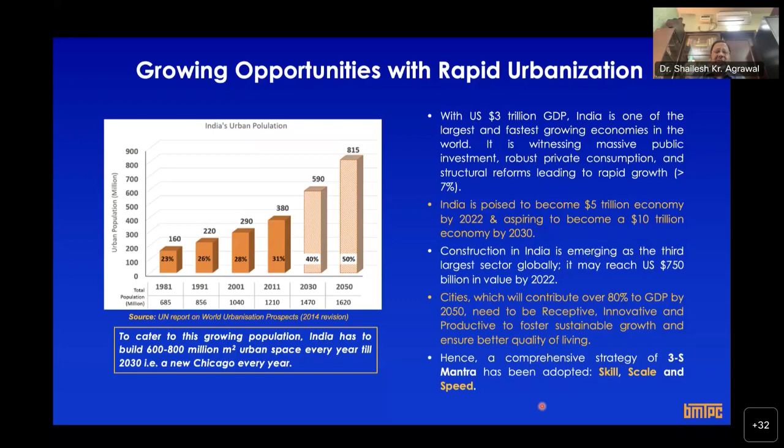This is that slide I was talking about, because this entire effort of NAVARITIH is under the Ministry of Housing and Urban Affairs, by BMTPC, and this quest for new technologies or innovative technology started with the Global Housing Technology Challenge, which I will also be discussing.

That GHTC, or this search for innovative technology, started under Pradhan Mantri Awas Yojana. Under Pradhan Mantri Awas Yojana, we are running a sub-mission called Technology Sub-Mission, and through that we organized a Global Housing Technology Challenge, shortlisted these new technologies, and now we are promoting them across the country. To give you figures of Pradhan Mantri Awas Yojana, the validated demand given by the states in 2015 was 1.12 crore houses.

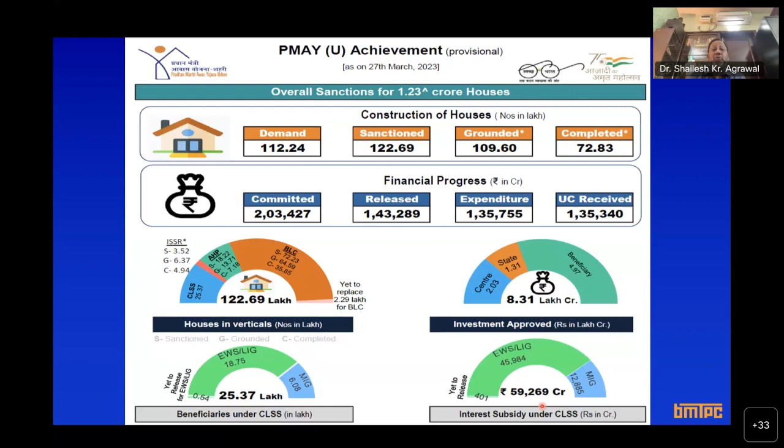That was the urban housing shortage in the EWS sector, economically weaker section, or poorest of the poor. Right now we have sanctioned 1.23 crore houses, out of which 72.83 lakh houses have already been completed and handed over to beneficiaries, and around 1 crore houses have already been grounded. Out of these, 16 lakh houses are being constructed with these new technologies, which I will be discussing with you.

And when we talk about these technologies, sometimes questions are asked, are we reducing the use of cement or steel? We are using cement and steel, but we are using them efficiently.

Pradhan Mantri Awas Yojana has also been helpful in generating employment, and you can see through this slide that so many mandays, so many jobs have been created, 2.77 crore jobs have been created through Pradhan Mantri Awas Yojana.

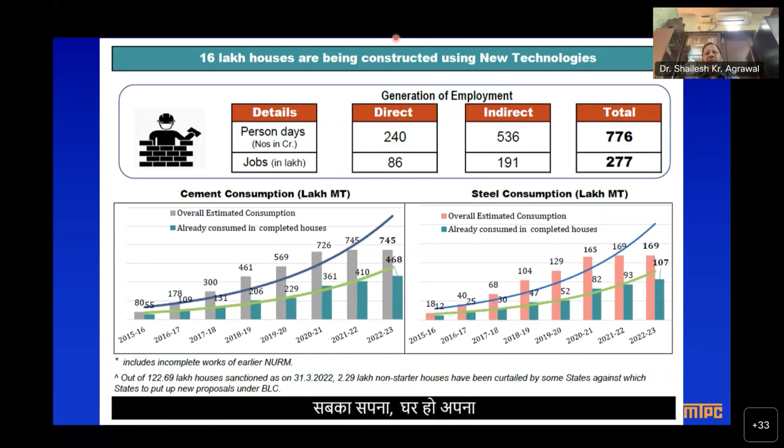The bottommost portion of this slide shows you the cement consumption and steel consumption through Pradhan Mantri Awas Yojana. This is just for your record, showing how many houses are being constructed under this scheme.

Now let me come straight to the lecture. When we talk about construction systems, a natural question comes to everybody's mind: what is a construction system? There are two things, dear friends. One is material, so we are using material like cement, concrete, or building elements like brick, brick blocks, or panels. But construction system is the system which helps in transferring the load of the building to the foundation. So the structural system is what is called the construction system. We are trying to replace the conventional construction system with an innovative construction system.

So what do we have? What is the business-as-usual approach, or what are the construction systems which are prevalent world over? One is, all of you are aware of, RCC framed structure, meaning we make a beam-column RCC frame, which is cast in situ normally. So we have a formwork, then we insert a reinforcement cage, then we do the concreting, and remove the formwork. That's how a network of beams and columns is cast. Then we cast a slab, and then we fill the walls with infill walls. This is the most prevalent system world over, called the RCC frame construction system.

So the question is, can we replace this system with any other construction system? That is the whole premise of this lecture, these innovative construction systems. I hope you understood that we are not trying to tell you to replace the material, but to replace the construction system.

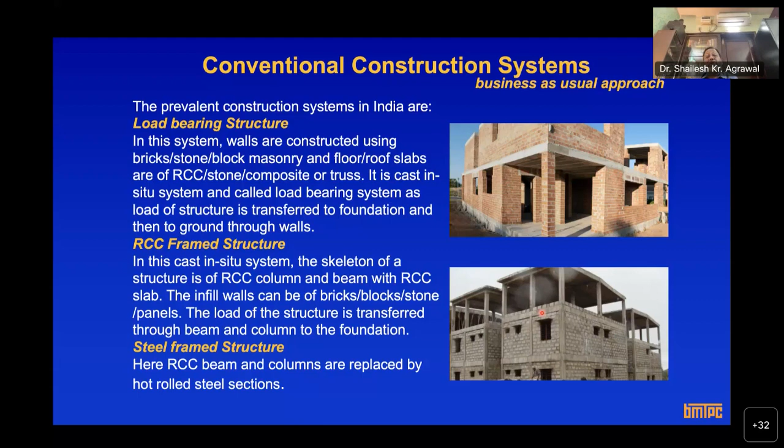So what I'm trying to tell you is to use these materials - cement, aggregate, sand - optimally. Nobody knew that sand would become so precious. So use these materials optimally.

Okay, and then during COVID time also, it was seen that there was a mass exodus of workers, laborers from cities to their own native villages and all. So can we have technologies? Can we have... and all construction works came to a standstill during COVID time. So that also needs to be seen.

Can we mechanize? Can we industrialize the entire process of the construction system? Mechanization and industrialization of the construction industry is also the need of the hour, and for that we require these kinds of systems. So the basic premise is that instead of doing everything at the site, if we do 50%, 60%, or the entire thing under controlled conditions in a casting yard or factory - it's sometimes called assembly line production also, like a car or automobile industry you might have seen. So can't we have assembly line production in the construction sector? You bring column, bring beam, bring slab, erect them, and your building is ready.

Okay, and the third point is also very important for us as engineers and architects. When I studied, 40 years back, green buildings were never talked about, sustainability we never heard of. But now, as engineers, as professionals, as project directors, it's our responsibility that whatever project we undertake, whatever materials or construction system we use, it has to be sustainable. There should be minimum wastage, and the project should be somehow green, energy efficient, eco-friendly. So all these things need to be talked about, and these innovative construction systems help with some of these things.

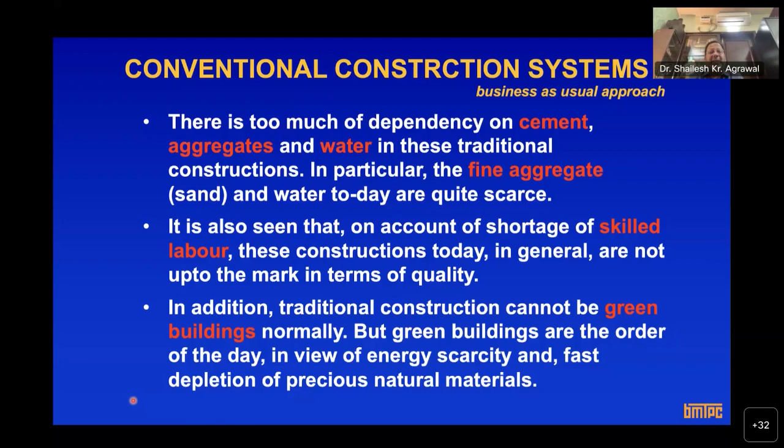Energy efficiency is also very important. So we need to use energy efficient materials, energy efficient construction systems, and then eco-friendliness. The materials, the technologies we should use should have less greenhouse gas emission and can be recycled. I will show you the life cycle cost also. And then health is also very important, health of the occupants.

Many times we take it for granted that when we construct a building with a business as usual approach or with conventional materials, the inside air quality is good, but which is not the case. The kind of paints, varnishes, pesticides, detergents and other things we use, the inside air quality is sometimes more poisonous or more dangerous than the outside air quality. So health of the occupant is also very important.

Friends, whenever you think of a project, think of resource efficiency. What kind of waste material are you using? Is that waste material fly ash, slag, or any other material? Then, compared with conventional materials, in what way is your project saving on energy? So there is a concept of embodied energy. What kind of embodied energy do the materials you are using have compared to your conventional materials? Then eco-friendliness, less greenhouse gas emission, less noise and air pollution, and the health of the occupants.

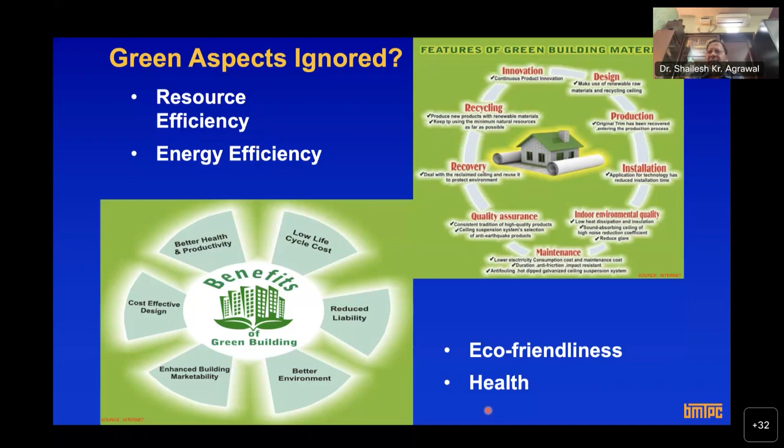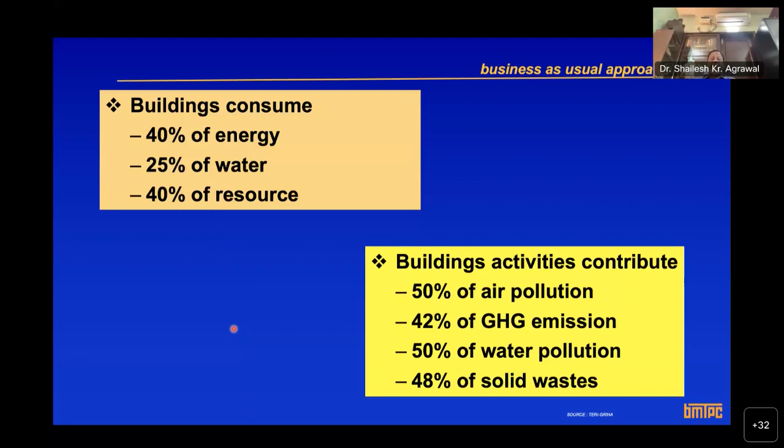Also, whenever we are talking about these new technologies, our architects and other friends keep asking, sir, these are thinner elements, how do these technologies fare when we talk about functional parameters like fire resistance or fire rating, then thermal, and then sound acoustics? So let me tell you that all these new technologies, because in the beginning I told you that these technologies are time tested and proven, the thermal efficiency, sound acoustics, and fire rating of these technologies are as good as your conventional system.

And let me also tell you that if you are doing a construction in the Indian context, all these new technologies have to comply with the existing Indian standards. Whenever we undertake a construction project, like for earthquakes, for concrete, for the National Building Code, or for anything, we have codes. So if we say that in a residential wall a fire rating of 2 hours or 1.5 hours is required, these technologies need to comply with that, and they comply with all these things.

So most of the time I am asked, sir, what about fire rating? And also, if the fire rating is not as per the existing National Building Code or the other relevant code, the technology cannot be used. So most of these technologies comply with that.

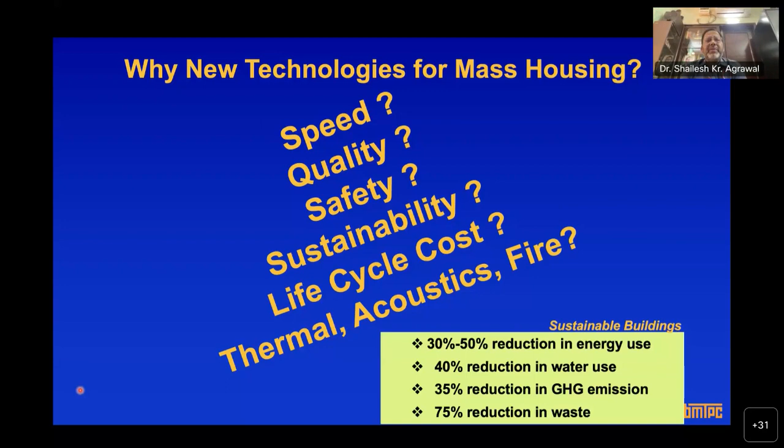So the idea is to take our country from level 0 to level 4. These levels show the levels of construction technology in our country. Level 0, all of us know about it. We collect the basic materials at the site, then we call the labor contractor, we erect the formwork, we erect the reinforcement, then we do the concreting, the curing, plaster, and all those things. That is level 0, and this is the most prevalent level in our country.

Then level 1 is where, like bus stands, railway platforms, or industrial buildings, we have steel trusses or steel columns manufactured in the factory, primarily steel structures. You all know how industrial structures are being constructed nowadays. Those trusses are brought to the site and assembled there, and you make that structure. So that is level 1.

Level 2 is where you make these building components. In level 0 you collect the material at the site, and here all building components, structural and non-structural, whether it is a beam, a column, a wall, a staircase, a sunshade, or any other element of your building, a shelf.

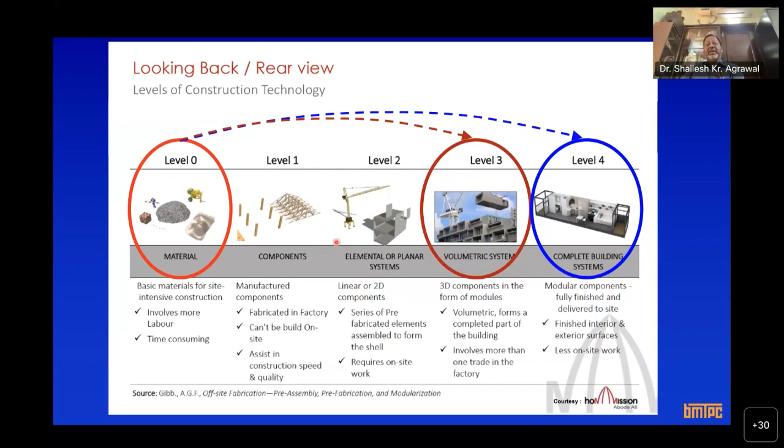There is another very interesting terminology which is knocking at the Indian construction sector: DFMA. Okay, all of you know, when we talk about construction, what comes to our mind? We think of a contractor. Okay, a contractor will come and he will construct. We will give him material, or we will ask him to bring the material, and then he will do the construction. Nowadays, agencies are available which are called DFMA agencies, and DFMA stands for Design for Manufacture and Assembly.

So, as per your project requirements, as per your project site, these agencies will entirely conceive your project, set up plant and machinery for you, then manufacture those building components there, assemble your building, and then go away with the plant and other things. So they are called specialized DFMA agencies. So the entire project will be conceived by them, including plant, machinery, and everything. So in times to come, instead of a contractor, you will look for this DFMA agency if you want to use these innovative technologies.

So they will set up a plant near your site, or if your site is near to the factory, then you can always take the material from the factory. Otherwise, at a casting yard, they will set up plant and machinery, and once the project is over, they will take away that plant. So I thought I will introduce you to this term. So replacing the word contractor by DFMA, Design for Manufacture, Design for Assembly.

Okay, and then this is also very interesting. Whatever I have so far told you or taught you, let's replace construction by manufacturing of building. The moment you understand the difference between construction and manufacturing of building, you will understand what I am talking about. Okay, so the moment I say manufacturing of building, that means you are doing something under controlled conditions, in a factory-like environment. I use the word assembly line production. So make building components, make the building under controlled conditions in the casting yard. So instead of constructing a building, manufacture the building.

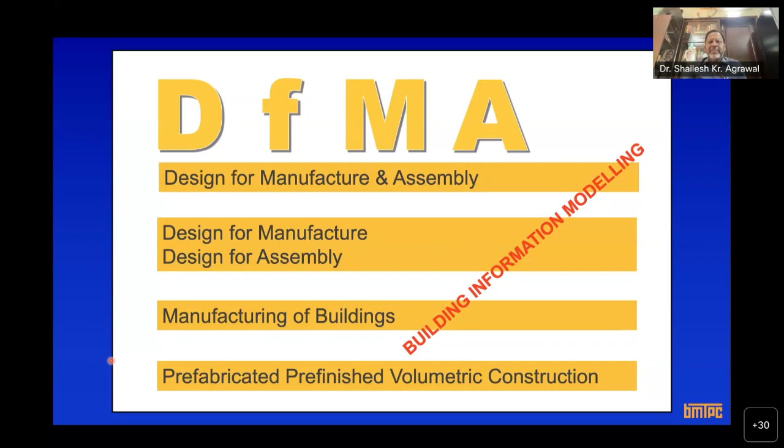As I told you, there is one startup. They have just bagged a project for printing barracks for the Ministry of Defense near Chandigarh. So 3D printing, again, nobody thought that we can print a house. Like we do printing, we just feed a command to our computer and we get the print. Similarly here, the entire thing is industrialized, and you have to just give a command and your house is printed with the help of robots and other complicated machinery. And here the construction ink is nothing but a specialized concrete. So you have robots and a construction ink which is concrete, and you can print the entire house.

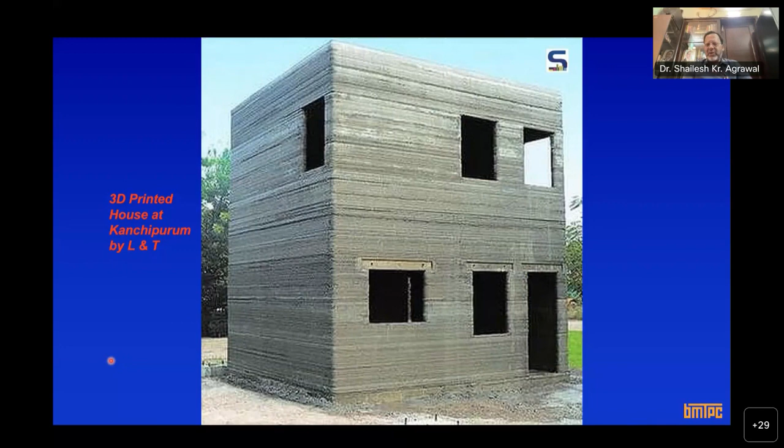So this was the background of the new technologies and the terms associated with them, and why we require these technologies. And now let me briefly introduce these technologies. As I told you, we have categorized these technologies like this, but it is not sacrosanct. It is just for better understanding and better comprehension. We have given the names, and each category will be explained to you in detail from tomorrow onwards. But today I will briefly introduce all of them to you. So I've given a name: engineered formwork system. This will be explained to you the day after.

Then stay-in-place formwork system, sandwich panel systems, cold-formed or light gauge steel structural system, then steel structural system, and then precast concrete construction system. And the precast concrete construction system category has been divided into two. One is 3D volumetric, the entire module, as I explained to you; otherwise, you make 2D or linear elements and then assemble them at site. So as you can see, 2, 3, 4, 5, 6, 7. So each day, one category will be explained to you.

Okay, and I will now briefly introduce these categories to you. But before that, let me also tell you that I have put 2 or 3 slides for you, because whenever we deliver this lecture, a whole lot of questions are asked. Sir, are we compromising on quality? What about time? What about cost of construction?

So let me tell you, for any new technologies, we have in fact created a framework, a technical framework also, to evaluate these new technologies as compared to conventional. So at no point of time, or nowhere, are these innovative technologies inferior to conventional as far as quality, time and cost are concerned. So let me just explain to you.

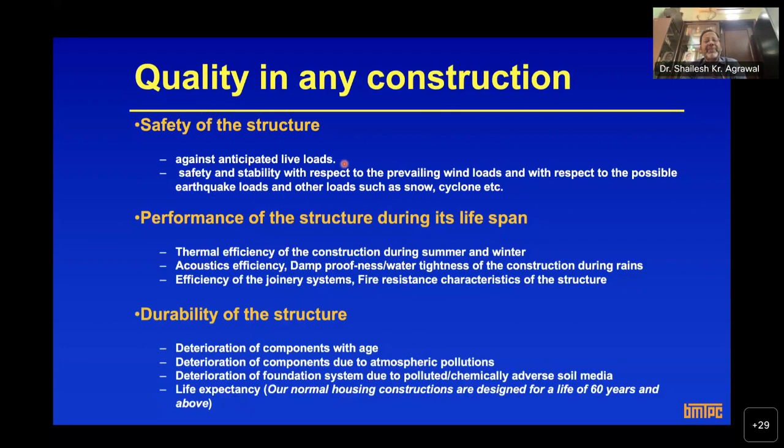Okay, then I already explained to you about traditional construction, that one is quality, then another is time. So when we talk about time or speed, traditional construction, all of you know, is slow-track construction and not amenable for mass housing projects. And because of undue time taken, most of the projects are caught with time overrun and cost overrun. And once your project is into time and cost overrun, a lot of overheads are added, there is a whole lot of wastage, not only in terms of human resources, but in terms of material as well. So speed of construction is the need of the hour.

Okay. Also, it has become essential to go in for faster construction in order to meet the heavy demand and in order to cut wastages and overheads. So you all agree with me, speed is one of the important criteria to decide the technology to be used.

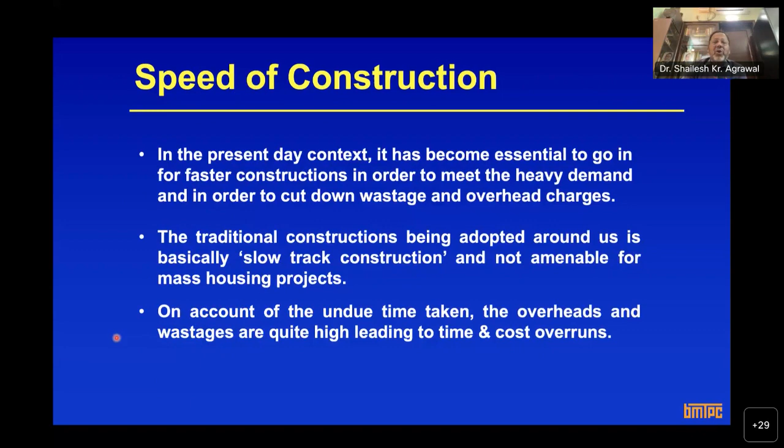Okay, and this is just a slide to show you that the most common question which comes to our minds is, what is the cost? So the cost can also be reduced considerably once the technology is mainstreamed. You can see these economies of scale. Okay, so economies of scale plays an important role while deciding the costs. Let me explain economies of scale, because most of these technologies are based on factory setup.

So let me give you an example: suppose you set up a plant for manufacturing one shirt or 100 shirts. Okay, so if you produce one shirt or if you produce 100 shirts, the factory setup is the same. So if you make 100 shirts, the cost will be equally divided into 100, otherwise it is loaded on one shirt. That is called economies of scale.

So similarly, if your project size is bigger, then the cost will be less than the conventional cost of construction. That is called economies of scale. So whether you are doing precast concrete construction or steel structure or anything, economies of scale plays a very important role. So this is for the initial stage.

Once the technology is mainstream, once we have enough plants across the country, economies of scale will also kick in, and you can have as good, as robust a house at a similar cost as conventional construction.

Because we are talking about climate change, global warming, greenhouse gas emission, eco-friendliness, green buildings, resource efficiency, and climate responsive design, cost is not the only factor. It is environment, it is time, it is quality. So cost effectiveness is more important, more critical than the cost per square meter.

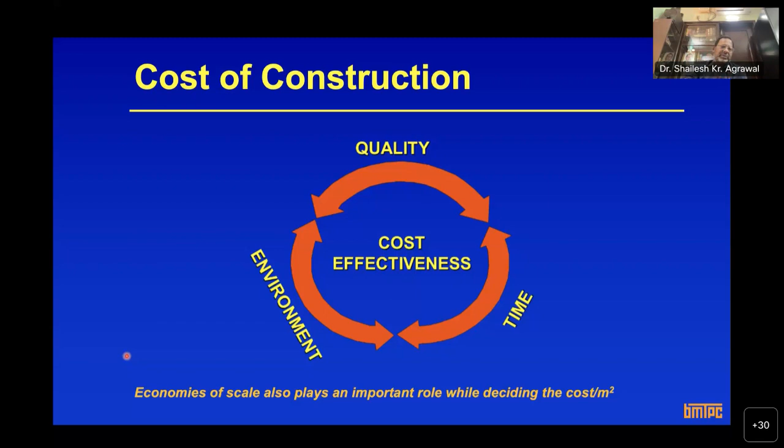So this is the background, and to sum up, the end user benefits through these technologies are: a safe and disaster resilient house, better quality of construction, low maintenance, speedy construction resulting in early occupancy, cost effective and environment friendly construction, which is also very important, and better functional performance of the buildings. So this was the background.

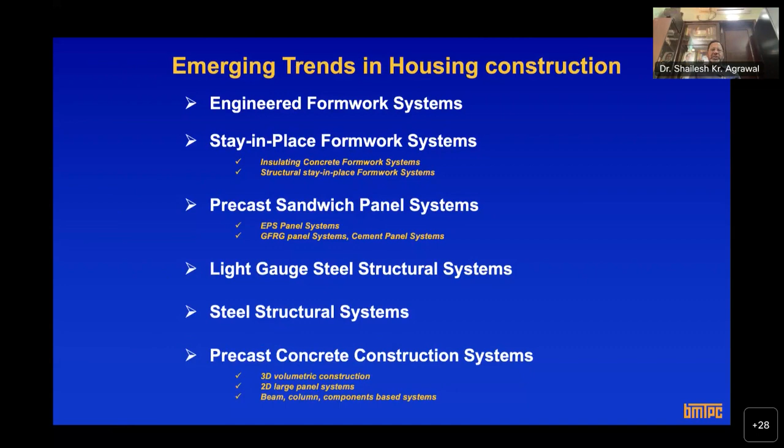A whole lot of formwork systems are used in the country, and this is the conventional or traditional formwork. Nowadays, this formwork can be replaced by aluminum, which you might have heard of as aluminum formwork system, or formwork made under controlled conditions in the factory. There are manufacturing plants where you make customized, tailor-made formwork suiting your project requirement. That is called engineered formwork system.

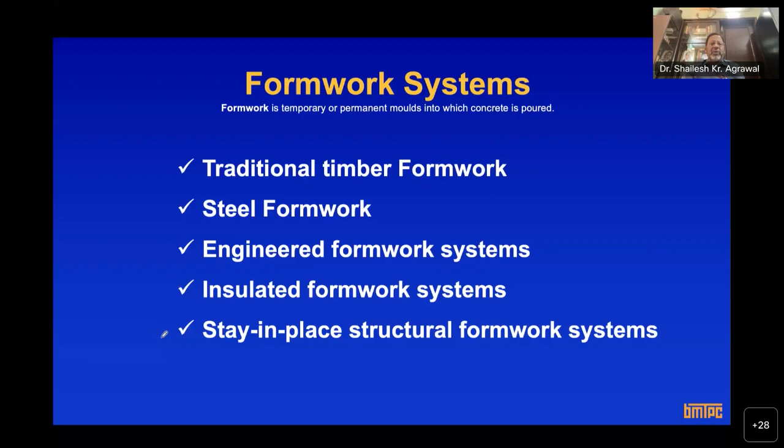There are another 2 kinds of formwork system which I will explain when we talk about that category. The first category is engineered formwork system, and most of you know this system as Mivan, or alu-form, or aluminium formwork. Through this picture I am trying to explain what this is.

This is a conventional construction system where the red thing you see in the upper right hand corner is the formwork, this is the reinforcement, then you put the concrete, remove this formwork, and this formwork can be of steel, plywood, or wooden planks. What about replacing this entire formwork with a customized formwork system made of aluminum, where there is no need to make beam, column and slab separately?

Here the entire formwork is manufactured in the factory, then brought to the site, and you do the casting in one single pour, then remove the formwork the next day and take it to the next floor.

So you can understand the advantages. This is called aluminum formwork. This can be called shear wall system. This is called monolithic concrete construction. There are umpteen number of names to this system: monolithic concrete construction, shear wall technology, or most of us know it as Mivan, because Mivan was the company from Malaysia who introduced this system to the country. Now Mivan has stopped manufacturing this formwork in Malaysia, and they have set up a factory here in our country.

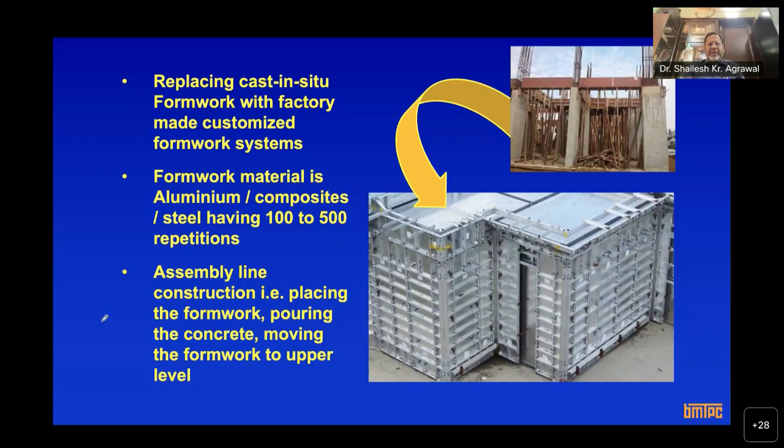So the staircase, the sunshades, everything is cast together—it's a pure monolithic construction. As you can see, the conventional mode of construction is RCC frame construction with infill walls: you make beam, column, and then infill walls. But here, all walls, floors, slabs, stairs together with door and window openings are cast in situ monolithically, using specifically designed custom modular formwork, normally made of aluminum. And most important is appropriate grade of concrete.

Self compacting concrete is being used. I'm not going into detail because there will be two lectures on this technology. So you have to use an appropriate grade of concrete which gains early strength. It should be self compacting concrete as per design, and it ensures assembly line production.

Remember, another thing is this is suited for mass housing. Mass housing means multiple units of repetitive type, when a similar design is repeated several times. But now this technology is very popular and widely used across the country, so even for 50 houses, this is more economical than conventional construction.

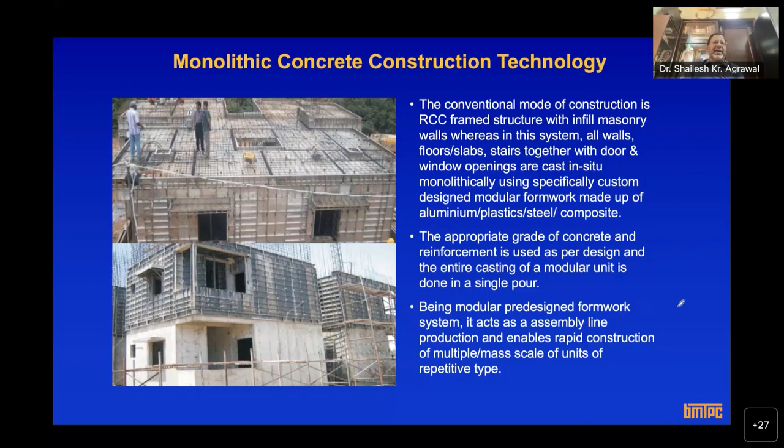Earlier, you had to have a certain economies of scale, but now the technology is mainstream and being used. So even for an isolated few number of houses, this technology is becoming viable.

Okay, another picture you can see, and another important thing here for all these technologies I am talking to you about: the foundation is conventional. Foundation conventional means it can be isolated footing, it can be continuous footing, it can be pile foundation, it can be raft. So why are we keeping conventional foundation? Because India is a vast country and soil conditions vary from place to place.

Somewhere we have black cotton soil, somewhere we have rocky terrain, alluvial soil. So depending upon water table and soil characteristics, you have a foundation reach up to the plinth level, and from plinth level above you start using these new technologies. I think I have a slide that I'll show you.

Once you come to the conventional plinth level, till that plinth level, the time taken by the project is similar to your conventional project with conventional foundation. Over and above that, the time is greatly reduced.

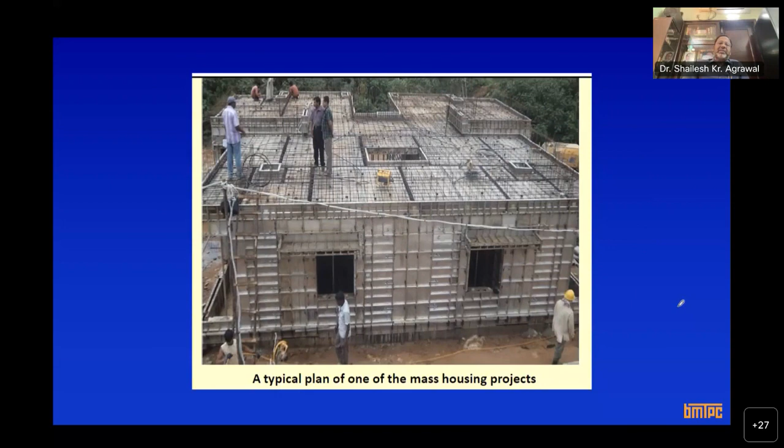Okay, so this is again a view, then you can see here. So what you see in this topmost left corner: up to plinth level this is conventional construction, and then you leave these dowel bars, and then you erect the reinforcement, erect this aluminum formwork, and then do the casting, then take it to the next floor. So this is that formwork.

As I've been telling you repeatedly, day after tomorrow there will be a specific 3-hour lecture on this technology, one by a CPWD engineer, and then by an industry expert from L&T. So these are the stages: you come to the plinth level and then do like this.

You can see this is again a finished mass house project under PMAY using this technology. As I told you, several lakhs, several thousands of houses are being constructed across the country using these technologies, and there are many advantages with this technology.

There is another variant, there are a number of variants of this technology. This is called tunnel form, and again this will be explained tomorrow. Here what we are doing is making the formwork for the entire dwelling unit, all 4 walls and all. Here only 2 longer walls are being cast, so it creates a tunnel kind of thing.

This technology we have used in one of our lighthouse projects in Rajkot, which I will be showing you, and that project was completed in a record time. In Rajkot we used tunnel form, and the building is S plus 13, 14-story building, and the entire 14-story building, each floor had 8 dwelling units. The entire thing was cast in 45 days, the entire skeleton. So this tunnel form, along with slab, was cast in 45 days for the 14-story building.

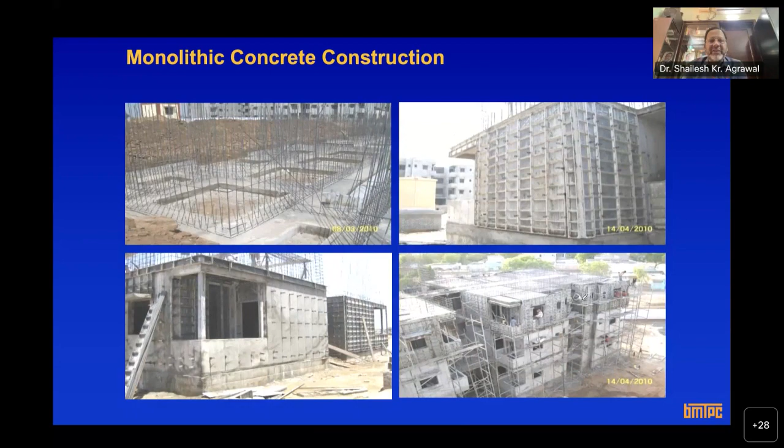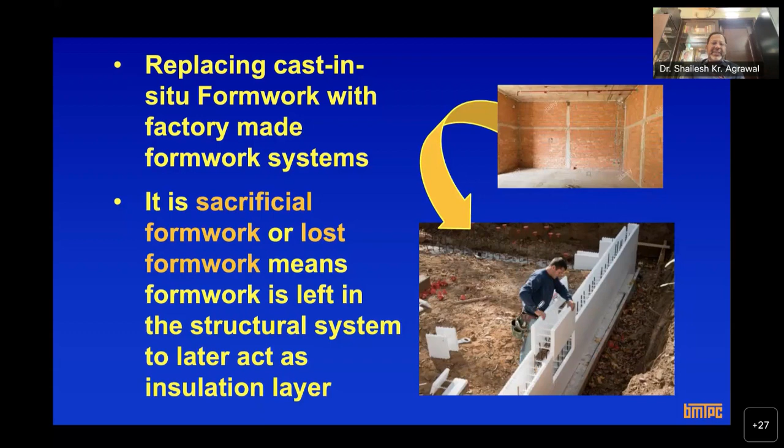So this acts first as a formwork system, and then it stays with the structure, and later, because it is expanded polystyrene, it acts as an insulation, and that is why it is called insulated concrete formwork system. So we are replacing cast in situ formwork by this factory made expanded polystyrene formwork system, and this is called sacrificial formwork or lost formwork. Means formwork is left in the structural system to later act as an insulation layer. There are several companies in our country who are into this kind of formwork system. You can see any joint.

So again, remember another thing I have been telling you, that all these technologies are customized or tailor made. Tailor made means you go to a tailor, and as per your size, as per your requirement, he or she stitches a jacket or a shirt for you. Similarly here, as per your project requirement, as per your plan layout, the agency will make these building blocks or formwork systems for you in the factory, customized, and then give them to you. So L, T joints and everything, depending upon the size, depending upon the height.

Okay, these formworks are manufactured and then brought to the site, and then placed on the already laid plinth. Again, the foundation is conventional; you have to reach up to the plinth level, reach the dowel bar, and then over and above that you will put this.

Again, for this technology also, we have an industry expert from Mahindra Lifespaces. He will be giving a lecture on this along with a scientist from CBRI. They will be discussing this technology in detail with you. Okay, so I think the basic premise or the basic background you understood, that this formwork is left in the structure. That is why it is called stay in place formwork.

And then these are two, and depending upon this, the thickness can be 150 as per your fire requirement, as per your structural requirement. You can have more width or more thickness. Okay, and you can put reinforcement and other things also. You can see this, and you can see this is a closer look again from India. So this is how it is being put, and once this is being put, then you do the concreting. You can fill the cavities, or you can leave the cavities as it is, and then on both the sides you can do shotcreting.

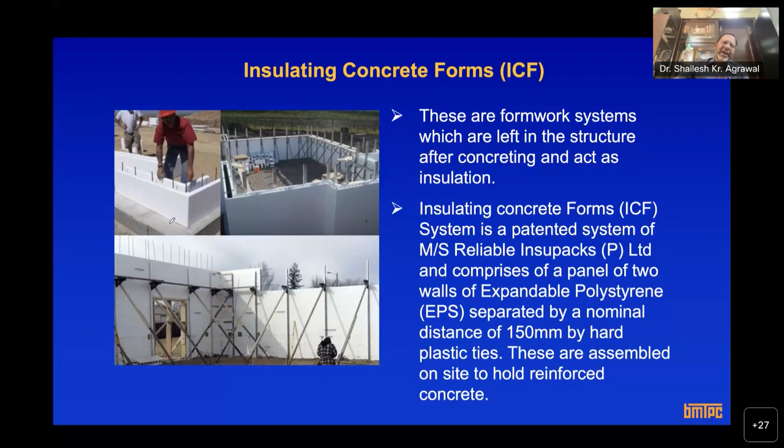Again, Coffor is the name of the company which is manufacturing this formwork. Again, it is customized as per your requirement. These Coffor panels are made in the factory and then brought to your site. And this formwork system can be used as a load bearing system, so there is no need to have beam columns.

You can just erect these panels, which are galvanized. I will show you. So these are galvanized plain steel sheets with a rib lath mesh, reinforced by C profile GP sheets as vertical stiffeners. I'll show you another slide. Then these grids are further connected by MS rebars. Okay, yeah, you can see here.

So this is a panel which is made in the factory, and then over a plinth you put this and then do the concreting. Here you require a sticky, less flowable concrete, and then you do the concreting and then you do the plaster. So this first acts as a formwork, and then later it acts as structural steel.

So after the erection of formwork panels in alignments, corners, edges for doors and windows, with rebar positioning placed, concrete of the required grade is poured, and once the concreting is done, the walls can be finished with plaster. So this is simple, and these walls can be thinner because you are using this formwork of galvanized plain sheets. This panel is made.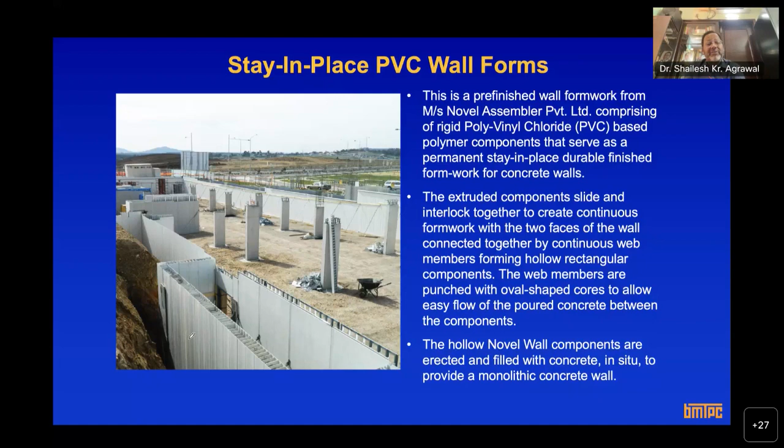We are dedicating 2 sessions. One entire session on light gauge steel structure system will be taken by a very renowned professor from IIT Hyderabad, who will be talking about light gauge steel structure systems, their equipment, how to design this, how to construct buildings using this, what kind of infill materials you can use. And there will be two lectures by IIT Kharagpur professors, who are basically architects, talking on hot rolled steel structure system.

Nowadays, steel structure systems have become very popular because the technology has changed. Nowadays we have TMT bars, and now we can make built up sections. Remember earlier we used to have hot rolled steel sections, I girders, channel sections, angle sections. Nowadays we can have hollow built up rectangular sections. Those have opened up a lot of flexibility into the structures, and you can use them for making a whole lot of different kinds of structure, and replace RCC beams and columns by these built up sections.

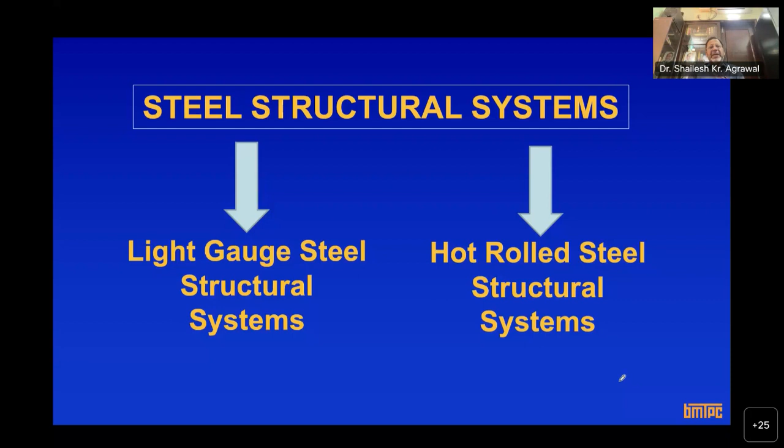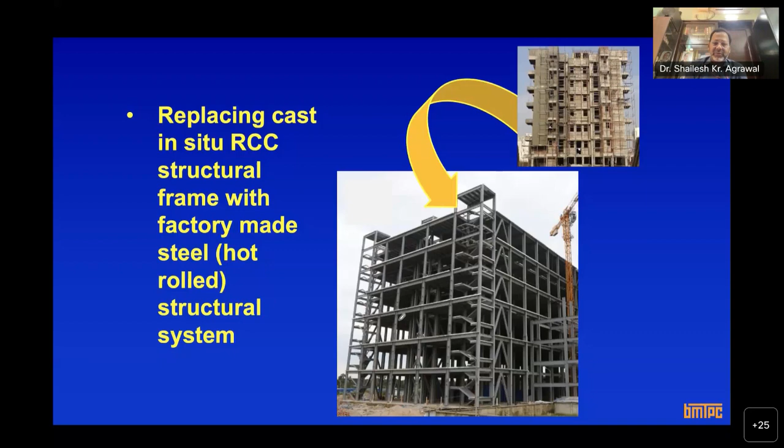Of course there is a whole lot of saving and speed. You can fast track the construction, because instead of making beams, columns and curing, you can just get them manufactured in the factory, and then you can have whatever drywall systems I told you about and insert those walls as infill walls here. I think I will show you that as well. So I think the basic understanding you must have got now. There will be a few lectures on this technology as well.

And let me also tell you that whenever we talk about these new technologies, the entire concept is done in a very professional manner through, you remember, computer aided design, manufacturing and construction. The entire thing is fed into the computer: your plan, layouts, elevation, the entire design process, and then through your software you get how many components are required, what kind of components are to be fabricated.

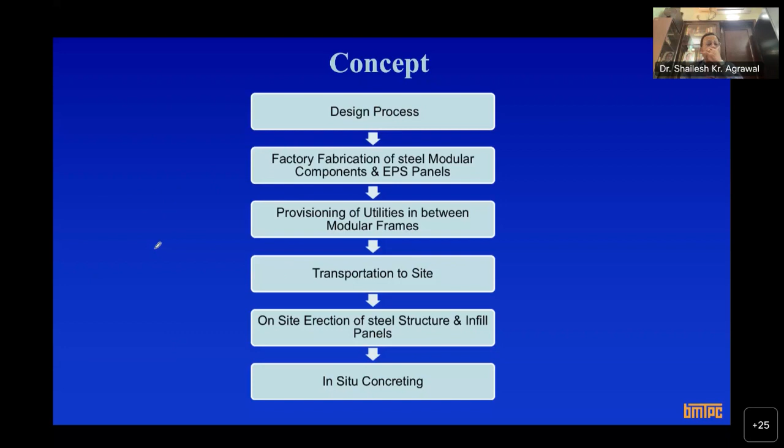So the entire thing is mechanized, automated, and then you fabricate those components in the factory. In the factory itself, you can give the provisions for services and other things, then transport it to the site, and then just erect them at the site. So the entire thing is an automated process, right from the concept stage to the construction or handing over stage.

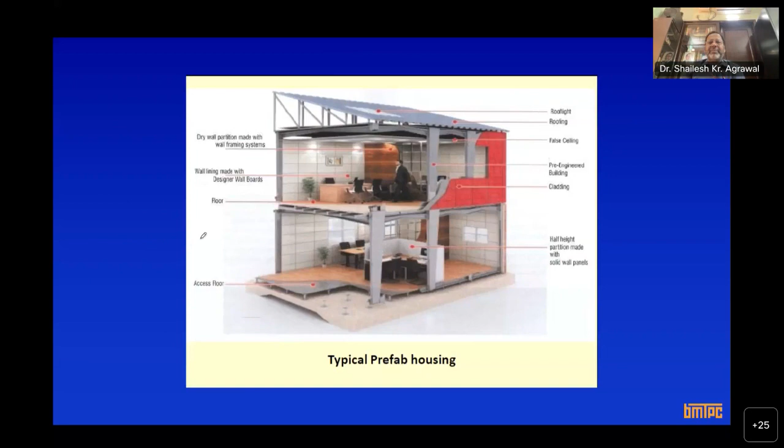You can see this. There is a company called InstaHome. InstaHome means instant homes. So they just make the entire thing for you, including finishes. I'll show you. You can see this. I just wanted to show you this.

So this is a very interesting 10-story mall, which was constructed in the outskirts of Chandigarh. You all know about Mohali. Mohali is quite famous for a cricket stadium. It's an industrial town in the outskirts of Chandigarh, where this mall was constructed in 48 hours. It was constructed, I think, in 2014.

This mall was constructed, and the entire operation was seen by the then Home Minister. The technology was not new. You just can't make out, but the technology is this: they have used steel beams and columns, and the walls are EPS. You remember I told you about EPS wall panels - so they have used EPS wall panels here, and steel. So by the time you do the foundations, you give the order for beam and column to the steel factory. They will manufacture those beams and columns for you, and then you just bring them to the site with all services, everything, and erect them, assemble them, and start using them at the site.

Since then this technology has been used, and nowadays, another interesting thing will be explained to you in one of the lectures on steel. Even the Ministry of Steel is asking all the line ministries to enhance use of steel in all their activities. So in the construction sector, we are also promoting use of steel. We use steel as reinforcement, but use of steel as a structural system for beam columns, trusses, and other things is being promoted because the technology has changed. Now we have built-up sections and all, which has opened up new areas and given a lot of flexibility. There is economy also when you use these built-up sections.

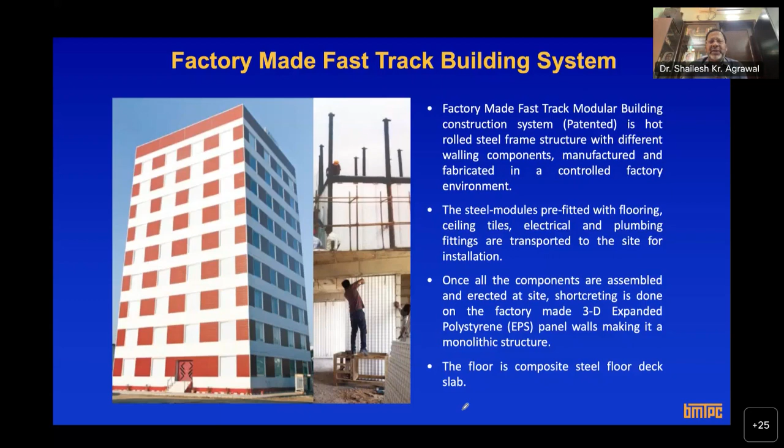Steel behaves quite good in tension as well as compression, so it is quite good for earthquake resistance as well. You can see this for quickly rehabilitating in case of disaster and all, it can be used for quickly erecting or quickly rehabilitating people.

This is a site near Dehradun. Some officers' mess and other structures for the Ministry of Defense are being made by the same company. These columns and beams were manufactured in the factory, and then they are putting the EPS. Here the slab is a deck slab - all of you know deck slab. So you put a profile sheet, and over this you put a nominal reinforcement, and then you do a screed concrete to create a slab.

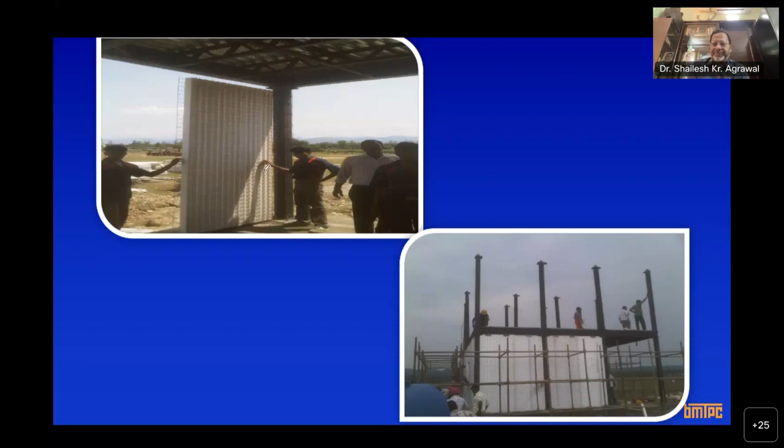In fact, I have used this technology after the Hudhud cyclone. We were asked to give a technology which can quickly rehabilitate the displaced people during the Hudhud cyclone, so this was the technology we gave. You can see these - this is near Vishakhapatnam, and Vishakhapatnam is a coastal area, so we have given them coating and all.

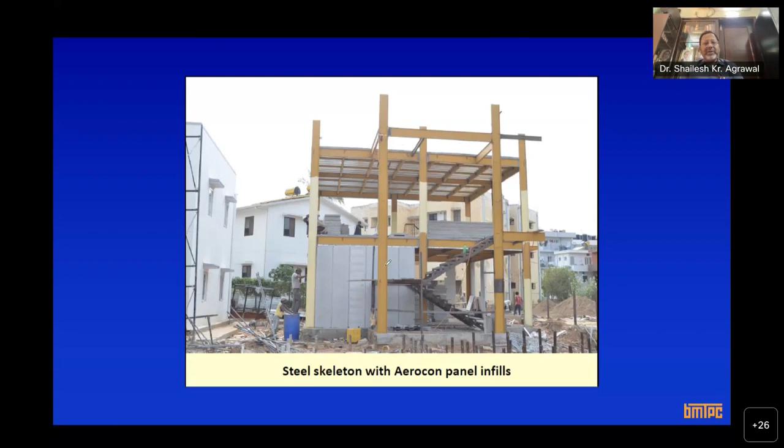So steel structure with deck sheet, and these are Aerocon panels. For infill you can use anything - the basic thing is the structural system, and the structural system is of steel. The slab is deck slab, and then these walls can be EPS panel, sandwich panel, PUF panel, as per your requirement, as per the utility of your building, as per the cost available. You can have these infill walls, and this comes out very cheap.

This is for industrial structure - all puff panel. This is a puff panel where you have this puff - PUF is a core of polyurethane foam, which is bonded between two PPGI sheets. PPGI sheets are pre-coated GI sheets, so PPGI sheets are profile sheets, and in between you have puff. So mainly for industrial structures, this puff panel with the steel structural system is being used.

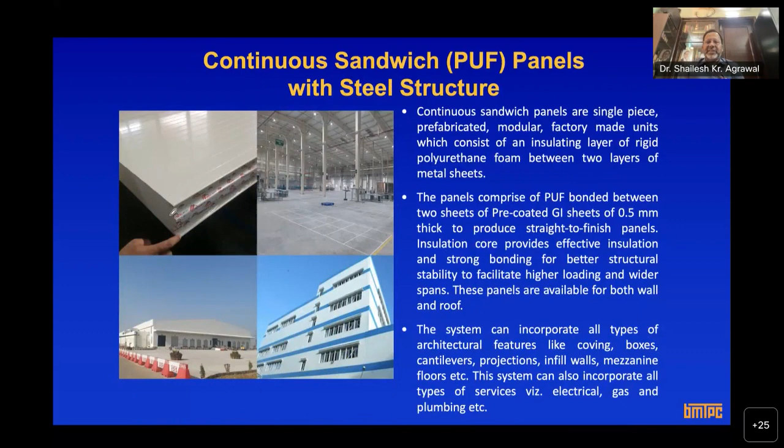Then there is another, sandwich panel with PUF panel - it can be used. There are a number of companies making it; Hyderabad Industry is one. Let me tell you that during COVID time, most of these panels were used for quickly erecting hospitals and other infrastructure for COVID patients.

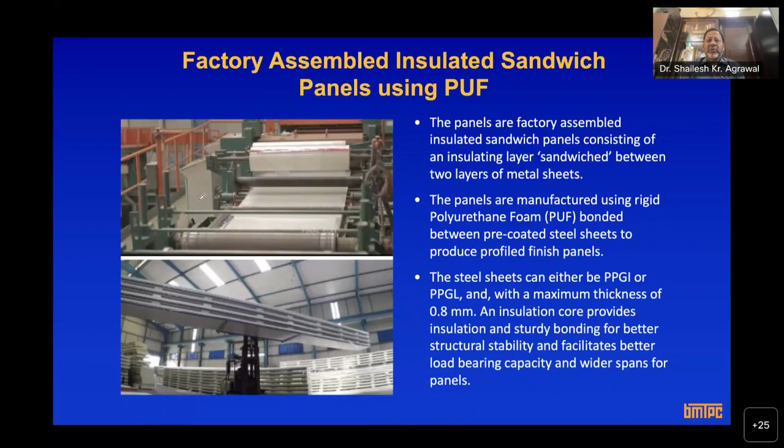Then there is another technology which is light gauge. All of you know about cold form. Steel can be manufactured in two ways: one is hot rolled steel, and one is cold form steel. So cold form steel is nothing but made from galvanized sheets, galvanized thin steel sheets.

They are put in a press to form different C sections and other sections to create light gauge steel sections, and these light gauge steel sections can be converted into wall panels, and then can be used to make low rise structures up to G+3.

As I told you, there will be a lecture of 3 hours by a professor from IIT Hyderabad, so I won't go into detail, I'll just show a few slides. This is how it is being done - you're replacing, and this is a very popular technology. I'll give you an anecdote also on this. First, this RCC frame construction is being replaced by this kind of light gauge structural system, as shown on the slide.

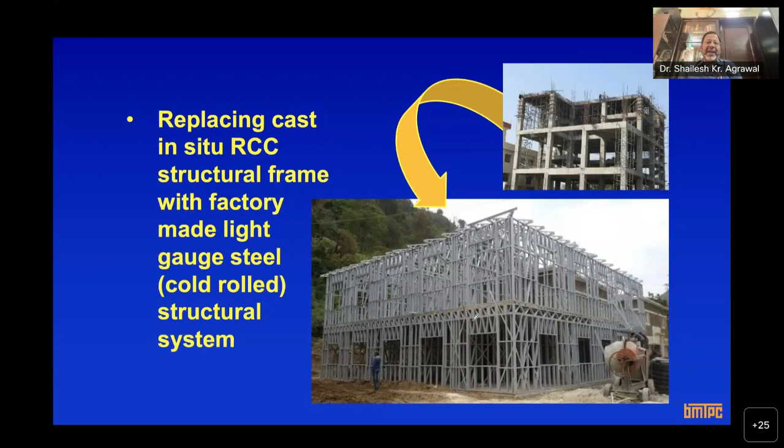These light gauge panels are made in the factory. This is again Jindal Steel - they have a plant near Raipur, and they have created an entire township using this light gauge panel. We have recommended this technology only up to 4 stories.

Abroad, in Hong Kong and other places, they are using it for high rise buildings. But looking at our hazard profile, we have recommended or certified this technology only for 4 stories.

The frame is made of cold rolled high strength steel section, and in between this space you can put a fiber cement board or EPS panel, and infill it with mineral wool or rock wool.

Light gauge steel has already been included by CPWD, and a detailed schedule of rates has also been created for this. Also for cold form steel, we have a code - long back, IS 800, all of us know IS 800 is for steel structures. Similarly, IS 801 is a code for cold form steel. It was made long back, and now they are revising it.

Cold form steel wasn't used earlier because it was replaced by concrete. Now again, it has become very popular, and it is being used for adding another story, for quickly erecting the structure. During COVID time, Hyderabad industry and other people made a lot of hospitals, COVID isolation centers and other facilities using this technology. It can be done very easily in a factory.

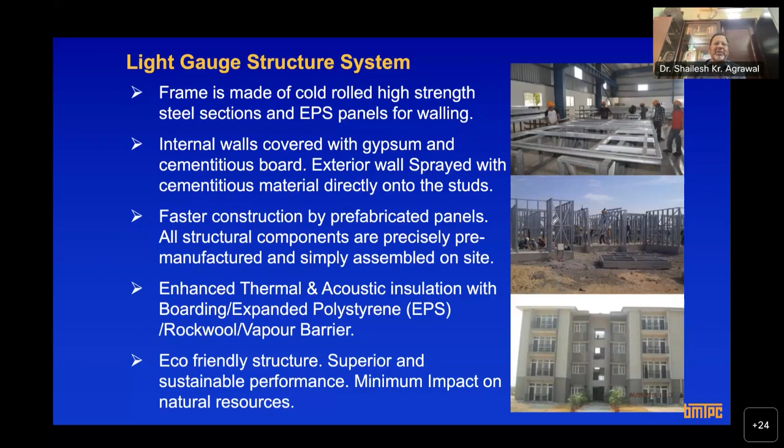As I've been telling you, now the last part of my presentation - all these technologies which I talk to you about, we have certified. Why have we certified them? Because whenever innovative technology or material comes to market, we as engineers and architects are reluctant. Being in government, sometimes we are reluctant for want of certification and absence of specification standards.

So BMTPC has been authorized by the Government of India through Gazette notification to foster innovative products and technologies in the construction sector. BMTPC is authorized to evaluate, assess, and certify new technologies. All these technologies which I discussed with you have already been certified by BMTPC - there are 42 of them which we have certified, and I just explained all of these to you.

If you want to download their certificate, you can go to my website, or on your dashboard we have given a link. So suppose you want to see 3D volumetric printing technology, you just click on that PACS - we call it Performance Appraisal Certification Scheme, or in short PACS.

You can see the certificate - it's a detailed certificate, and we call this detailed certificate a pre-standard. For technologies where there is no standard, this PACS can be used as a standard, and it gives details of that technology, its quality control measures, construction manual, user manual, design methodology, engineering and other parameters. The entire certificate gives a whole lot of information along with design details.

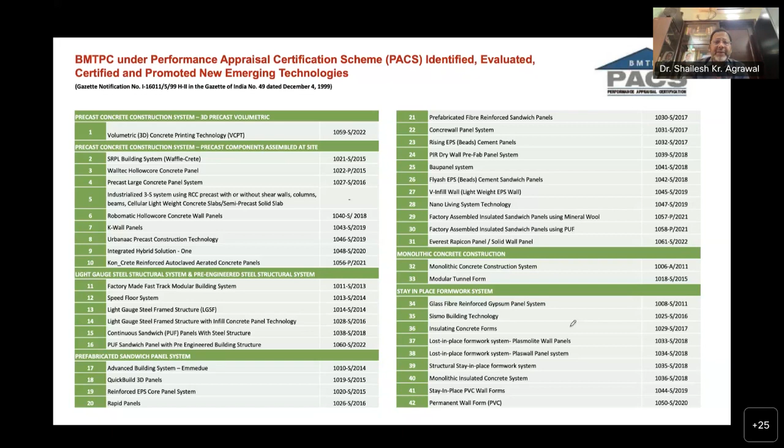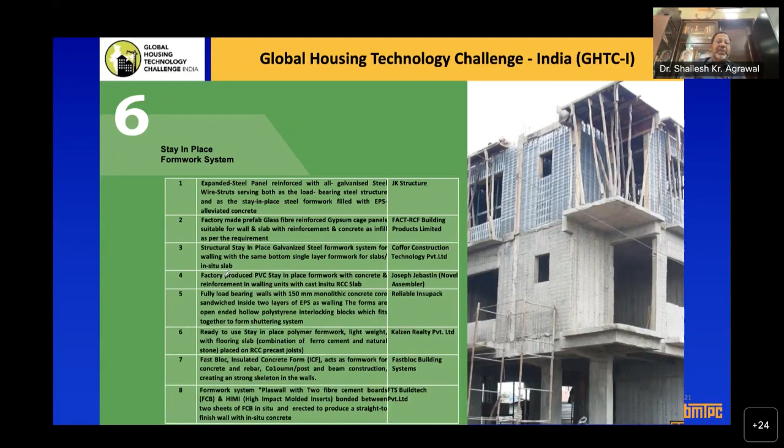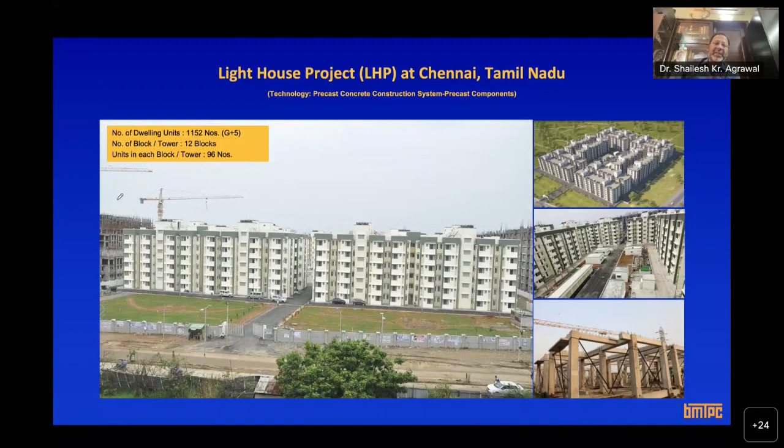Okay, I think I have a slide for each lighthouse project. Yes, so this is the Chennai project. So you see, it's a 6-story structure, 1152 houses are being made. This project was done by Shirke. So they set up a plant just around 800 meters away from the site. At the casting yard, they made all elements, beam, column, then transported them to the site, and they created this structure. This is already over and inaugurated.

So these are the stages. This is a manufacturing plant where you have molds and then a pressurized casting yard, where you can do the fast curing. Then these components are made, transported to the site and erected at the site. You can erect these components, then place the slab, and then do the in situ concrete to create a monolithic concrete action. And then in between, here they have used infill walls.

In Delhi, they are using precast shear walls. So instead of infill walls, you can use precast walls as well. So these are the things they have used. Okay, in between you can put the services.

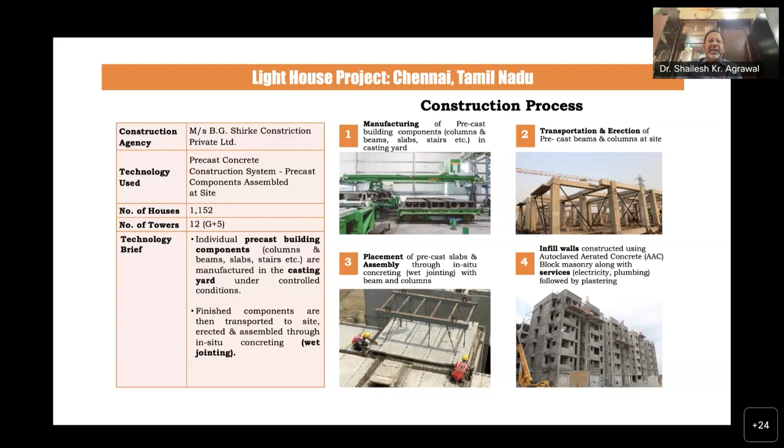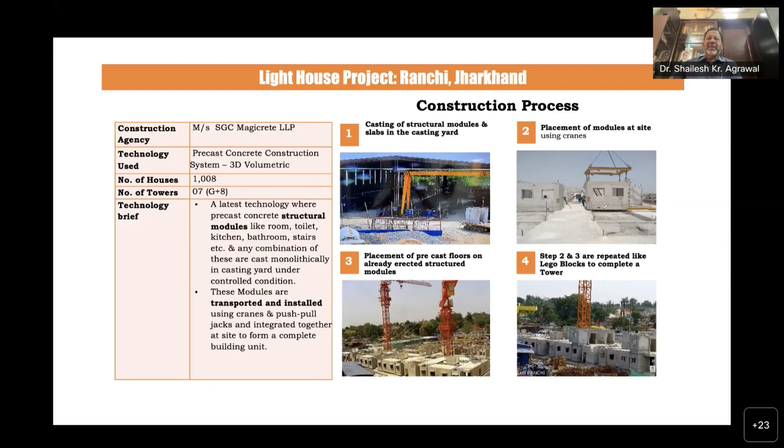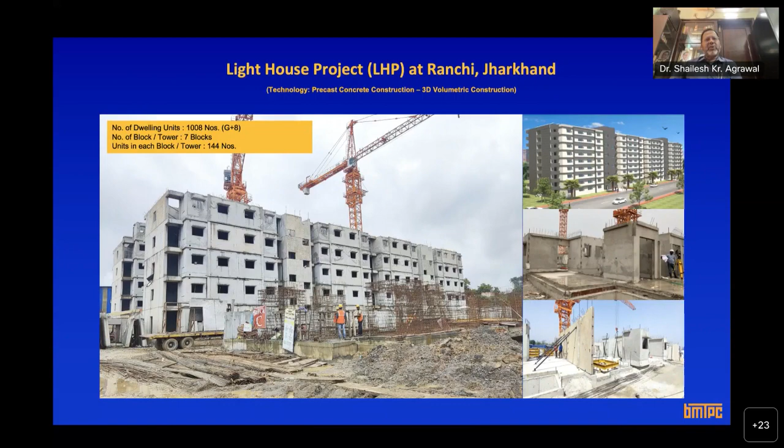And this is Ranchi, a very interesting project. Again, we will have a detailed presentation on this. These are the modules. You can see this is a casting yard, which is made just adjacent to the site. In the casting yard, all these modules are made and then put one over the other to create the entire building. It's a 9-story structure, and most of the blocks have already reached 9 stories. So you all can go and visit these lighthouse projects.

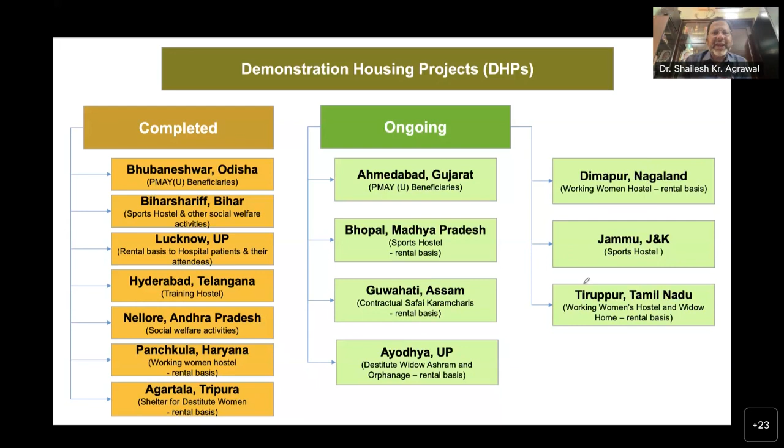And during the construction time, we also impart training to professionals, students, as well as artisans, so as to spread awareness and to educate the masses. And as I have been telling you, to popularize and mainstream these technologies, it is very important that we create an enabling ecosystem for these technologies. So we are working hand in hand with the CPWD.

CPWD has already issued SOR, schedule of rates, for all these technologies. I think we have given a link on our website. So for all these technologies, they have an SOR. Like we have the Delhi schedule of rates, similarly they have created a Delhi schedule of rates for new emerging technologies. So you can download that. I think we have put that PDF file on your dashboard as well, so you can download and see the schedule of rates for all these technologies.

Also, nowadays, because of time and the advantages associated with these technologies, most states are adopting them. Andhra Pradesh is one of the biggest states using the monolithic aluminum formwork system and tunnel formwork. In Hyderabad, a lot of agencies are using tunnel form and precast. In Chennai, Tamil Nadu, they are using precast concrete construction and tunnel form. So as per your requirement, you can use any of the technologies.

One more thing I wanted to tell you here: this is a basket of 54 technologies, and suiting your requirements, your time and finances available, you can choose any of the technologies. So as I often say, we have created a basket of 54 innovative, alternate, sustainable technologies, and as per your requirements, your space, other things, and the agencies available, you can choose any one of the technologies.

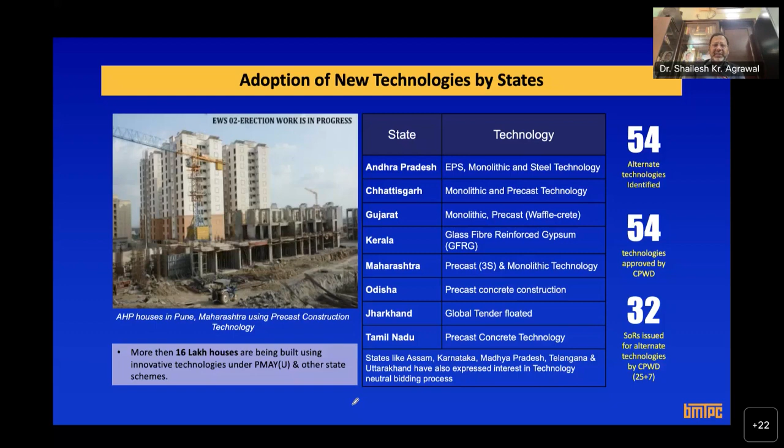Okay, so with this, we come to the end of today's 3-hour lecture. Today I have given you a brief overview of what the Ministry of Housing and Urban Affairs (BMTPC) has done. We have created a basket, we have been studying these technologies, and we are trying to promote these technologies through these initiatives.

Also, when the GHTC, Global Housing Technology Challenge, was organized, at that time itself the Honorable Prime Minister desired that we should at least educate people and professionals regarding these technologies, because we know that people still do not know that these technologies exist in our country. So through these courses, we are trying to reach out to all of you professionals,

trying to teach you, educate you, and make you aware of these technologies, so that in your future projects you can use them. Also, you can visit all of these ongoing projects and understand for yourself the various intricacies of these technologies. Also, the agencies working in these technologies can be reached. You can connect with them; their addresses, their numbers, everything is given in the compendiums.

Constantly, we are publishing literature on all these technologies, so you can get access to all these technology providers and start exploring these technologies. Also, we have provided enough literature on your dashboard. These lectures are only for 1 hour or 3 hours, so please refer to that literature. Because it's new, you will find it in scattered form in different books, so we have put it in a single compact book, which is being given to you, so you can refer to it and start using these technologies.